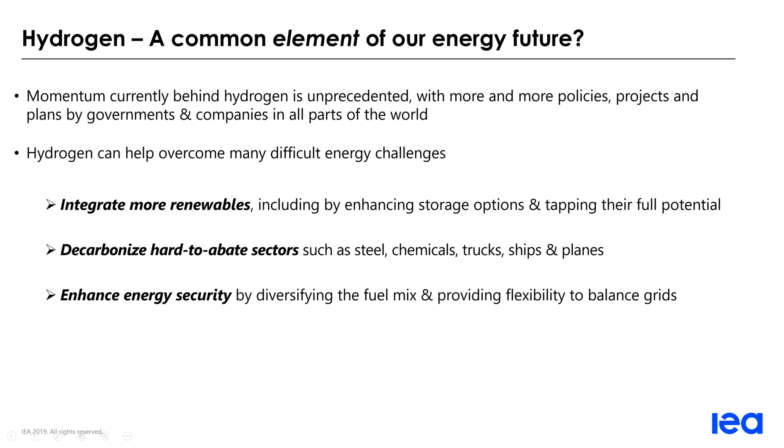And thirdly, at the IEA it's incumbent upon us to stress the importance of energy security, both through diversification of the fuel mix, but also trade. In a low carbon society that people are planning for today, hydrogen clearly adds something in terms of its ability to be made from many different energy sources, in fact, all energy sources, and to provide, as a chemical energy carrier, energy flexibly to many, many different applications. So these are 3 key changes we see in the energy policy debate that are strengthening the optimism around hydrogen.

The second is the tension that persists, especially in the transport sector, between the development of infrastructure and the investments that need to take place in end-use applications or hydrogen supply. And the coordination challenge of infrastructure is something that provides risks.

Today, most hydrogen is from fossil fuels. That's something we're going to come on to in a moment. And we need cleaner hydrogen.

Lastly, there are, in many cases, regulatory barriers or barriers in terms of absence of standardization, which are making it harder for people to make investments in this sector. So that's kind of the framing of the work that we've been doing in this report.

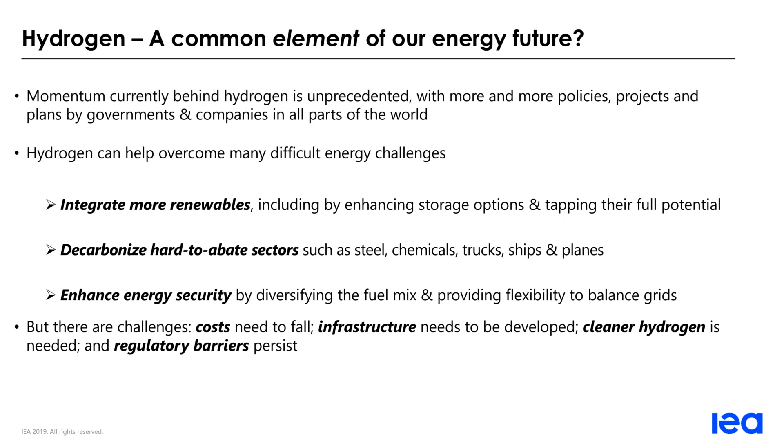In order to get a handle on some of these issues and how they are changing, we developed what we think are three unique databases for this work. The first is a database on policy support. We undertook a survey with the support of the Hydrogen Technology Collaboration Program that we manage here at the IEA, and we surveyed governments in terms of which policies they already have in place, in terms of targets, in terms of direct incentives that support investments in hydrogen.

We found that there's a growing number of countries that have policies in place to encourage hydrogen deployment. By mid-2019, the total number around the world is around 50 policies in place. So it's higher than at any time previously, and that's natural, but it's reaching a level that is really a tipping point in terms of encouraging action.

Among the G20 countries and the European Union, 11 countries have policies in place and 9 have national roadmaps for hydrogen energy. That's a data set of policies that we've made available for free on our website now, and we encourage people to go and download that at the end of this webinar, and also to provide us feedback if you have any suggestions for additions.

There's a second database that we've made freely available on projects for the supply of low carbon hydrogen around the world, and we've got some charts on that you'll be able to find in the report, and we encourage you to look at that as well.

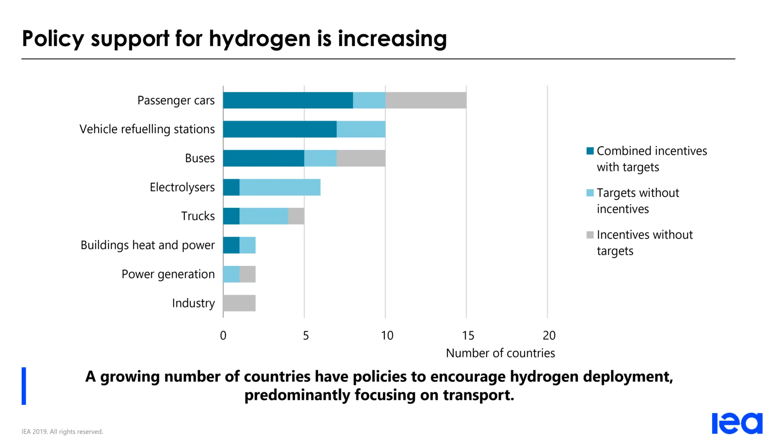I'm going to talk briefly about the third data set that we have in place now, and it's actually on the supply of hydrogen throughout the energy system since 1975. In order to understand the growth of hydrogen and where we stand today in terms of its production, where it's being produced, from which fuels, and the sectors in which it's being used around the world, we've tried to go right back to 1975 and look at energy data, industrial data, to build up a data set and to show growth.

What we found is that since 1975, demand for hydrogen has been growing at around 3% per year. That might not sound like a great deal, but if you look at this chart, demand for pure hydrogen around the world has grown 4 times over that period.

When we talk about pure hydrogen, what we mean is the use of hydrogen that is molecular hydrogen in a pure form, not mixed with anything else. The demand for that hydrogen is mostly today in the refining sector, where it's used for hydrotreating and hydrocracking of oil in order to produce transport fuels, but it's also used in the chemical sector, mainly for making ammonia, and most ammonia today is used in fertilizers, expanding food production around the world, which has had a huge impact on our ability to feed the world over those decades.

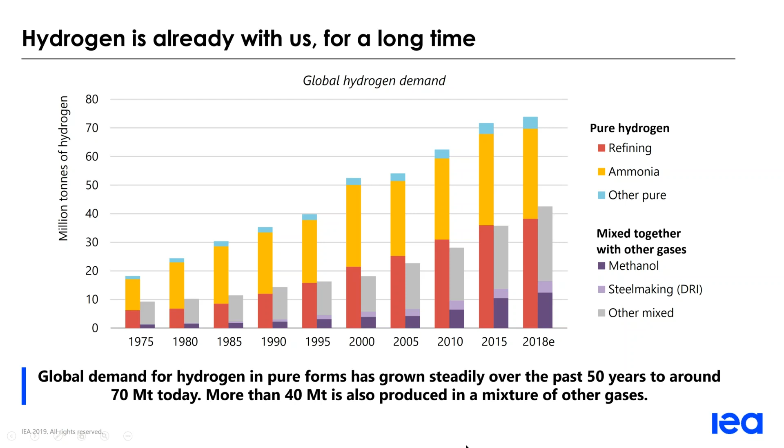As Simon just mentioned, the production of hydrogen today is largely based on fossil fuels, dominated by gas, but also coal, particularly if you look at China today. This leads globally to CO2 emissions of around 830 million tons of CO2 per year. To put this number into perspective, that corresponds to the annual CO2 emissions of the UK and Indonesia combined today, or represents a quarter of the CO2 emissions from cars on the road today worldwide.

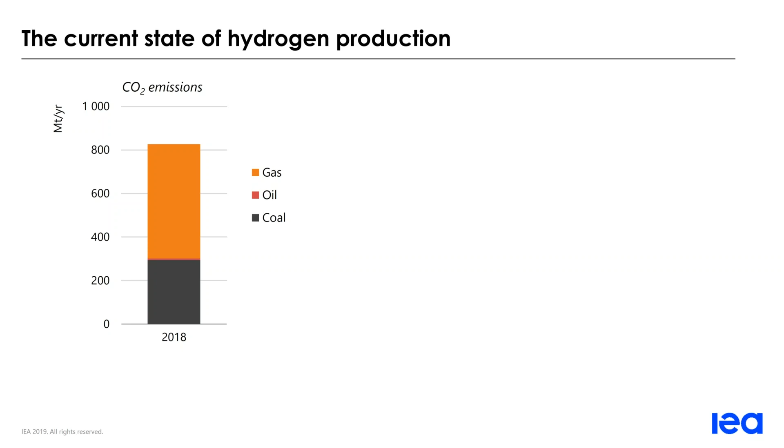It's quite understandable, or the reason why it's based on fossil fuel, I guess, is not surprising. It's really basically just economics of producing hydrogen from fossil fuels. It stays, in most cases, the cheapest option. In most parts, it's actually natural gas, the cheapest option to produce hydrogen.

Natural gas can also be coupled with CCUS, meaning that the generated CO2 is captured before it reaches the atmosphere. That can either be stored underground, or it can also be used, for example, for enhanced oil recovery.

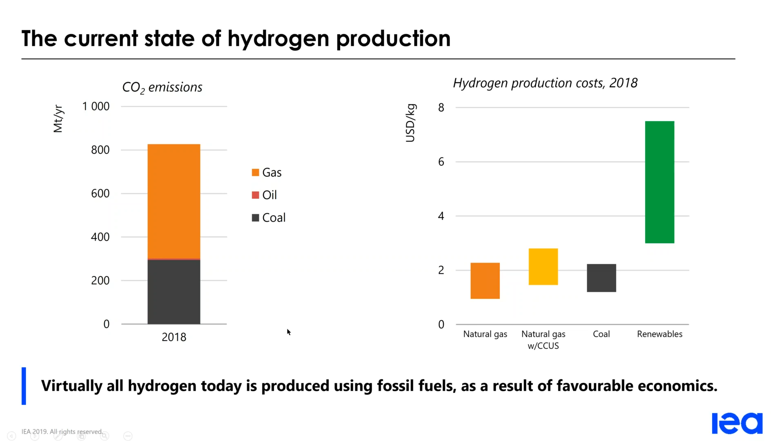If one looks at the costs of coal, it's actually also quite cheap. As I mentioned before, that's largely occurring today in China. The other option to produce hydrogen is to use electricity and water, then using electrolyzers to produce hydrogen and oxygen as a byproduct. That's actually today the most expensive option, and scale-up is really required to bring down the costs of water electrolyzers in the decades or years to come.

Scale-up of CCUS for hydrogen production has already begun. This is illustrated, or based on significant efforts of government and industry over the last two decades all around the world to deploy or introduce CCUS into the energy sector.

If we look at hydrogen production, there are today already 7 projects that are linked to CO2 capture. As I said before, otherwise it would be CO2 that would be emitted to the atmosphere. Generally, the CO2 is stored underground. As part of its use, it can also be used for enhanced oil recovery. In other cases, it may also be sold commercially and then used for industrial purposes.

Even if the number of current projects of 7, what I mentioned before, appears quite low, the hydrogen that's actually produced from these CCUS facilities today is more than 20 times the hydrogen production today from water electrolyzers around the world. We identified in our database around 200 projects of electrolyzers, and again, hydrogen from CCS production is actually larger than the hydrogen from electrolyzers.

And actually more CCS projects are underway. We identified 15 projects around the world that are in construction, so have been announced. Of these, 8 CCS projects were announced last year in Europe, and all were for the application of CCUS to hydrogen production at a large scale. The other option for CCUS also is to apply it to existing hydrogen production facilities.

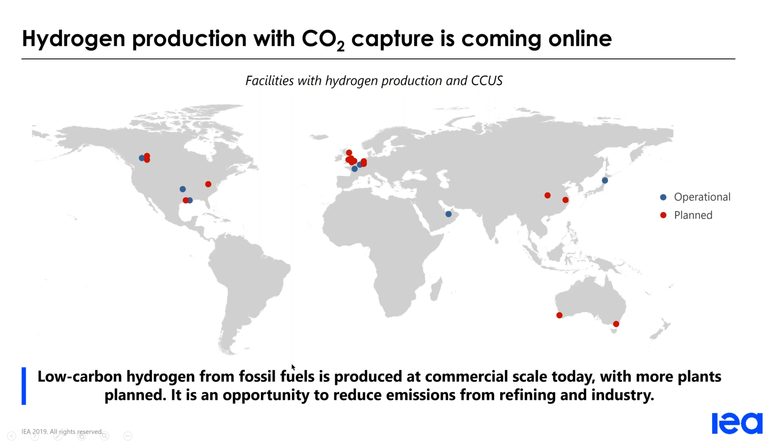I mentioned the word scale-up already a few times. So scale-up is also happening for hydrogen production from renewable electricity. Over 200 projects have we identified that have started operations since 2000 around the world. The encouraging news is they're actually getting bigger over the years. Projects have been announced today at a size up to 100 or 200 megawatts of electricity input, compared to an average of around 1 megawatt over the last decade.

But one also has to keep in mind that these projects are still relying on government funding.

They need to scale up and become commercially viable to further bring down the costs of hydrogen from water electrolyzers in the future.

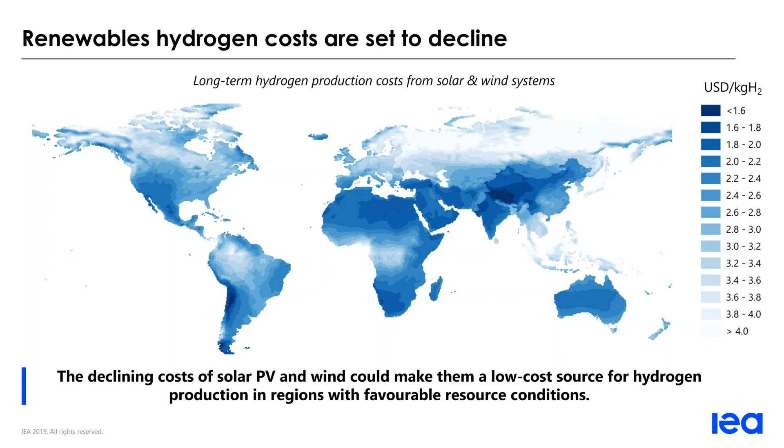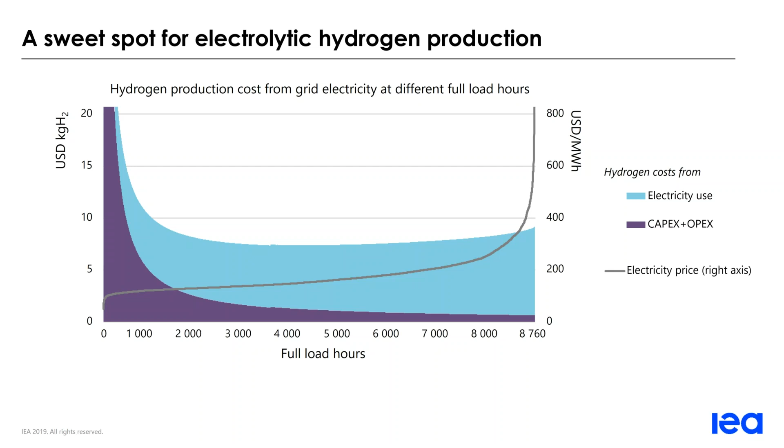So there's actually a kind of optimum or sweet spot for hydrogen production from electricity, which lies in a range depending on the electricity system and country or region—one is looking at between 2,500 and 6,000 hours per year.

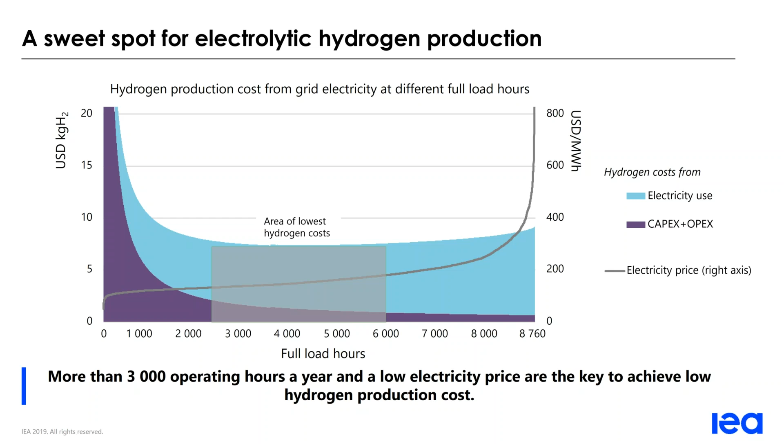Overall, whether we talk about grid electricity or dedicated renewable electricity generation, a combination of low electricity costs and sufficiently high full-load hours is needed to really get an optimum, or low hydrogen costs, from water electrolyzers. That's a kind of challenge—it's not only about having low electricity costs, but also keeping an eye on the achievable full-load hours. This combination of low electricity costs and sufficiently high full-load hours is the recipe for achieving low hydrogen production costs from water electrolyzers.

For hydrogen to be a fuel or feedstock in a clean energy system, the question is also important: what are the associated emissions with producing hydrogen? If you look at the production of hydrogen from coal, it actually leads to CO2 emissions of around 20 kilograms of CO2 per kilogram of hydrogen.

To put the number in perspective, if all the current production of 70 megatons of hydrogen were produced today from coal, it would lead to CO2 emissions of 1.4 gigatons of CO2, roughly equivalent to today's combined emissions of Japan and Australia.

The carbon footprint of hydrogen from coal can be drastically reduced by combining it with CCUS, leaving CO2 emissions of around 2 kilograms of CO2 per kilogram of hydrogen. If we look at gas, that actually leads to lower CO2 emissions than coal, of around 10 kilograms of CO2 per kilogram of hydrogen. Combining hydrogen production from gas with CCUS could reduce CO2 emissions compared to coal by 95%.

If you look at water electrolyzers, the CO2 emissions is very much linked to the carbon intensity of the used electricity. If you look today at the global average CO2 intensity of 500 grams per kilowatt hour, that would actually lead to higher CO2 emissions compared to the two fossil fuel pathways, whether it's coal or natural gas. So it's also important that the electricity used for electrolyzers is sufficiently low carbon intensity.

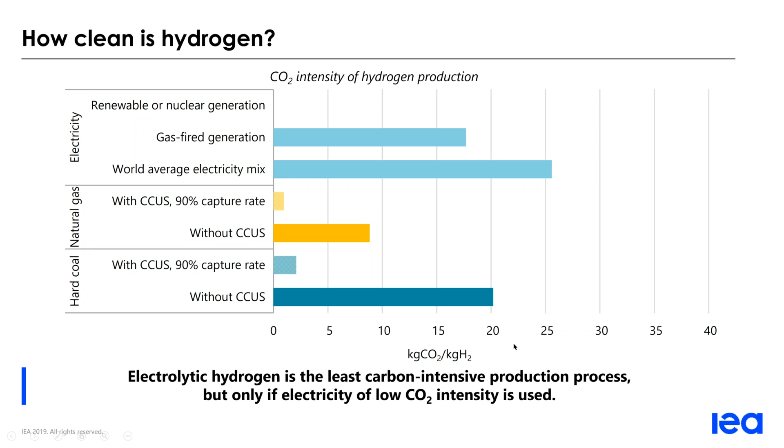If one would look at the CO2 intensity threshold to make water electrolyzers comparable to natural gas, they would need a CO2 intensity of around 185 grams of CO2. That illustrates again that for water electrolyzers to become a clean hydrogen source, the CO2 intensity of electricity has to be sufficiently low. Ideally, in the case of renewables, it would be close to zero, which would be the lowest CO2 intensive option to produce hydrogen.

So far, I only talked about the production cost of hydrogen. But if we talk about the delivered cost of hydrogen, it's also important to keep in mind the cost of transporting hydrogen, especially keeping in mind that the energy density of hydrogen is quite low. It's really a challenge in terms of transporting, storing, and distributing hydrogen, which raises the question: what's the best way to do this?

There are different possibilities available to address the transport channels. Like natural gas, hydrogen can be liquefied at temperatures of minus 250 degrees Celsius to increase its density. This requires, however, based on today's technologies, around 20 to 35% of the initial hydrogen to be liquefied. For comparison, for natural gas, this energy penalty is around 10% today.

An alternative option is to incorporate the hydrogen into larger molecules that can be more readily transported as liquids. For example, ammonia is an option, where the conversion losses would be around 7 to 18%. The third option we've analyzed is to use so-called liquid organic hydrogen carriers, where hydrogen is loaded into molecules such as toluene, which then has very similar properties to a liquid and can be transported. We look at these three options as shown here.

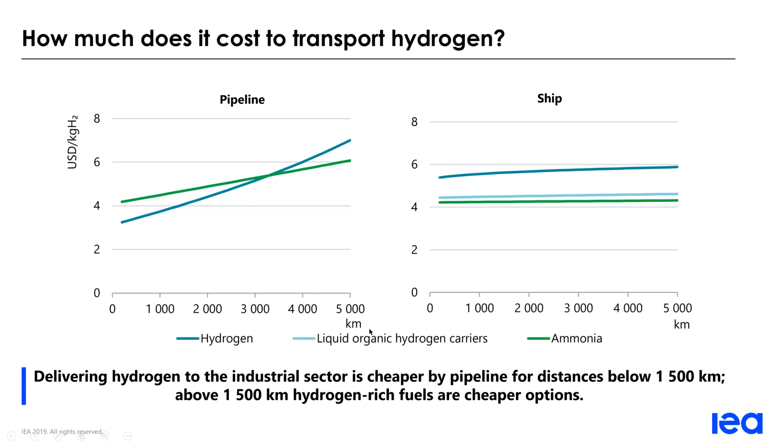So as we saw at the beginning of this presentation, today hydrogen is mainly used in the oil refining and chemical industries. But for hydrogen to make a significant contribution to the clean energy transition we need to undergo, it also needs to spread to be used in other sectors. This gives us two main categories of opportunities over the next decade.

Firstly, hydrogen demand in existing industries is growing. All of these uses can readily accept substantial quantities of clean hydrogen instead of hydrogen generated from unabated fossil fuels. And we can get to very high scales very quickly just by deploying CCUS and electrolysis for these sectors, which will bring down the costs of hydrogen production significantly over the next decades.

In the last 12 months, there have been announcements from some of the world's largest refiners, fertilizer manufacturers, and steel makers, notably in Europe and Australia, and these companies plan to build electrolyzers to supply hydrogen to reduce their emissions.

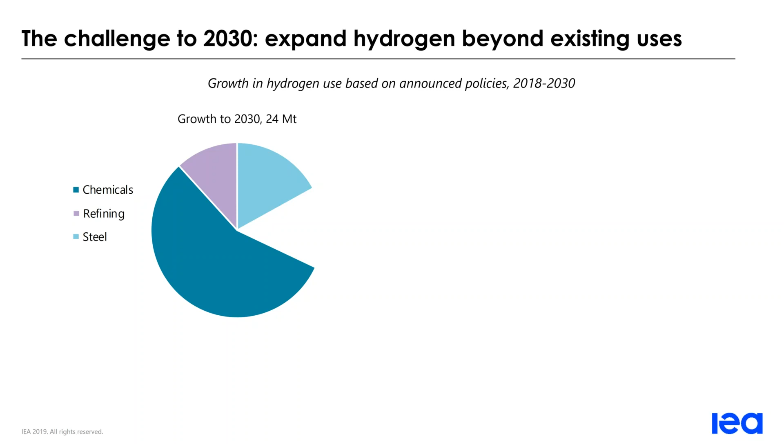And then the second category are new uses for hydrogen, and we're starting from a much lower level of demand here, but there are ambitious plans that have been set in place around the world.

For example, in the building sector, it's already been shown that hydrogen can be blended into the natural gas grid and used safely in homes. But now projects in Europe and Canada are aiming for a significant scale up in this area. And if you add up the ambitions of these projects around the world, these proposed plans look to supply about 4 million homes worth of hydrogen by 2030.

And then in the cars and vehicle segment more generally, there are 11,200 fuel cell cars on the road today. But just looking at official governments' targets, this would increase the vehicle component to 2.5 million by 2030 if all these plans were realized. And then there are a couple of other sectors where we think hydrogen will be particularly important in the long term, but where it hasn't made much of a dent in the market yet.

So clean hydrogen converted to liquid fuels or ammonia, like Uwe was touching on before, using technologies that are well known today - these are among the most promising options for cleaning up shipping and aviation. But they'll take some time to develop, and we need to start on this now.

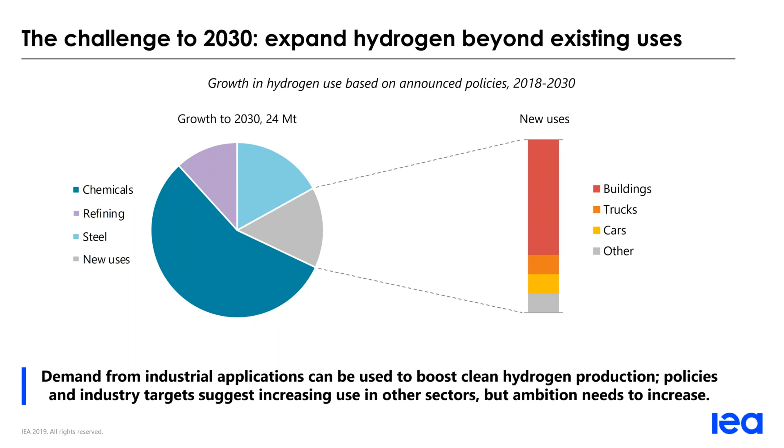So let's first take a look at the existing sources of demand that we see growing in the period to 2030 and beyond, with the chemical sector being the largest among these. The two most important bulk chemicals from a hydrogen demand perspective are ammonia and methanol.

This rate of growth would mean around 38 million tons of hydrogen demand for ammonia production by 2030, relative to around 31 million tons today.

For methanol, demand for existing applications is set to grow at around 3.6% per year between 2018 and 2030, so faster than ammonia. And the methanol-to-olefins and methanol-to-aromatics segment of this is expected to grow even faster. This is a chemical technology that allows you to produce plastics and other materials from, say, coal feedstock, which is commonplace in China today.

And this rate of growth would mean 19 million tons of hydrogen demand for methanol by 2030, relative to around 12 million tons today. So quite fast growth in the methanol segment.

And there are some other sectors which I won't have time to go into here - existing uses. We expect nearly 3 million tons of demand growth from the refining sector and around 4 million tons from the iron and steel sector in the direct reduced iron route that was mentioned at the beginning.

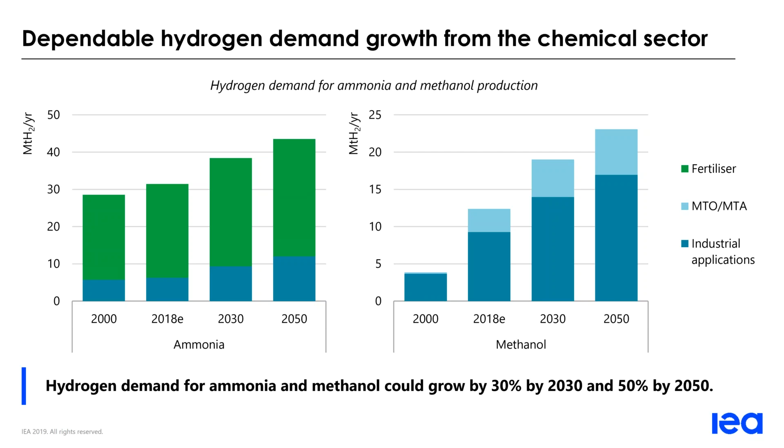So again, sticking with the chemical sector, let's take a look at the economics of production via various process routes. Fossil fuels have long been a convenient and cost-effective source of both the hydrogen and, in methanol's case, the hydrogen and the carbon that's required as feedstock for these chemicals.

In 2018, around 270 million tons of oil equivalent of mainly gas and coal were used to produce the hydrogen for these two products. This quantity is roughly equivalent to the combined oil demand of Brazil and Russia. Gas is the dominant feedstock for ammonia and methanol globally, with China and small shares of production elsewhere utilizing coal.

So taking a look at ammonia specifically, we can see considerable variance in costs for production based on both coal and natural gas. In regions with high natural gas prices, such as Japan, the levelized cost of ammonia production can be more than $500 per ton, whereas in those with access to low-cost gas reserves, such as the Middle East, levelized production costs can be less than half this figure.

Then the electrolysis pathway and biomass gasification, which is not shown here for clarity - these routes offer the potential to eliminate CO2 emissions altogether on a net direct basis, with the caveats that the CO2 intensity of the electricity, as Uwe outlined, has to be below a certain level to get an emissions benefit, and the sustainability of the biomass in the biomass gasification case also has to be a factor to consider.

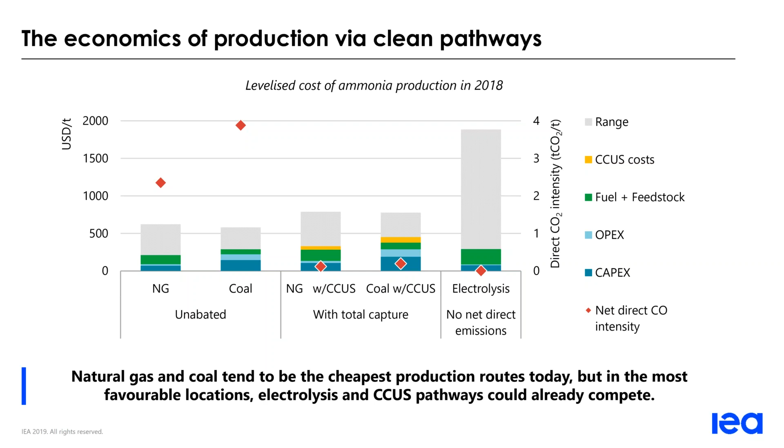So besides existing industrial uses, of which the chemical sector was a partial summary, hydrogen has also got the potential to grow in new applications. And I want to highlight just two in this presentation, as we don't have a lot of time, but please dig into the report where we examine several others.

So firstly, trucks. While there are around 11,200 hydrogen cars on the road today, there are only around 400 trucks and around 500 buses. Not only do trucks consume much more hydrogen than cars over their lifetime, but they also tend to concentrate their journeys in so-called corridors, traversing specific highways to and from ports and industrial hubs. These are the main reasons why we identify them as a key new application.

And just to take a look here at the future economics - we're using the total cost of ownership metric here. If hydrogen fuel cells were to reach a cost of $95 per kilowatt, and battery costs were to decline to $100 per kilowatt hour, the battery and fuel cell trucks we examine here could have a similar cost, assuming a driving range of 500 kilometers.

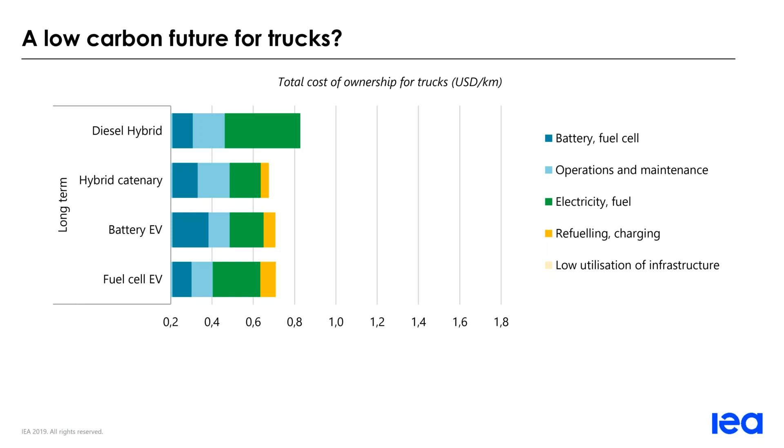One of the critical variables to achieve this competitiveness is to ensure that the hydrogen being used is of low cost. This includes low production and distribution costs that Uwe has covered in the previous slides, but also a low cost for the refueling step.

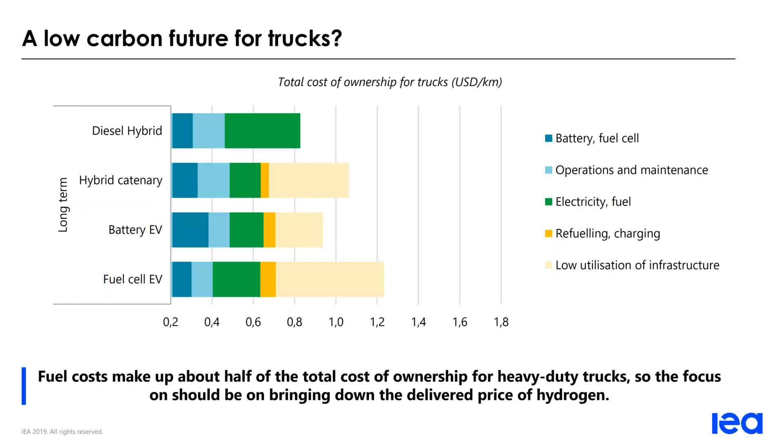So this in turn requires a high degree of utilization of the refueling stations to ensure that the capex, which can be in the order of $1.5 to $2 million for a station, only accounts for a small share of the overall hydrogen delivery cost. Of course, an alternative to achieving this high utilization is more of a hub and spoke model rather than refueling stations along the corridor, where a dedicated fleet can operate on fixed routes and then refuel at a single centralized station.

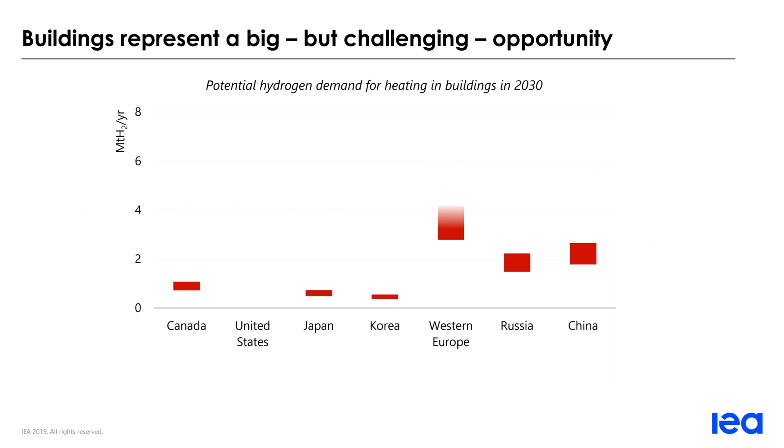And now lastly, just to move on to the second example of new applications: heating demand in the building sector. While there's much talk of blending some proportion of hydrogen into existing natural gas supplies, here we examine the near-term potential and the economics of a pure hydrogen supply, similar to projects that are being discussed in the UK at the moment.

So we find that hydrogen used for heating in buildings presents a substantial outlet for growth, but the economics of this will be critical. Delivered hydrogen prices to consumers would need to be in the range of $1.5 to $3 per kilogram of hydrogen, to compete with natural gas boilers and electric heat pumps on an already installed basis, excluding the capex component. For certain countries like Canada and the US, where lots of cheap gas is available, the hydrogen prices would have to be even lower, so around $1 per kilogram of hydrogen.

Serious planning, though, would need to be undertaken today for the necessary deployment for the potential identified here to be achieved by 2030. It would also be imperative to overcome concerns relating to safety of handling and distributing hydrogen in residential areas.

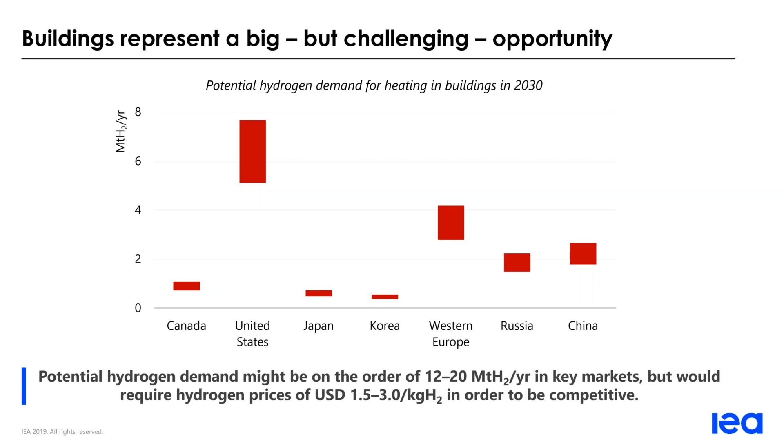The way we've ended up framing our policy recommendations is around what we've called four key opportunities for scaling up hydrogen. Throughout the report we focus on three time horizons: today, 2030, and the long term, broadly mid-century. We see 2030 as a critical moment for hydrogen in its deployment journey. Getting to 2030 with a springboard for future hydrogen deployment established, meaning bringing down costs, scaling up supply technologies, and developing an industry that can make sustainable investments based on confidence in future revenues, is the key challenge for governments and industry in the next ten years.

Looking at where the risks lie and the challenges in various sectors, we've tried to find these four opportunities based largely on where there is existing infrastructure, so there isn't the coordination problem of developing new infrastructure and new sources of demand and investments in new equipment all at the same time as developing low carbon hydrogen supply, while also building on existing government policies and targets.

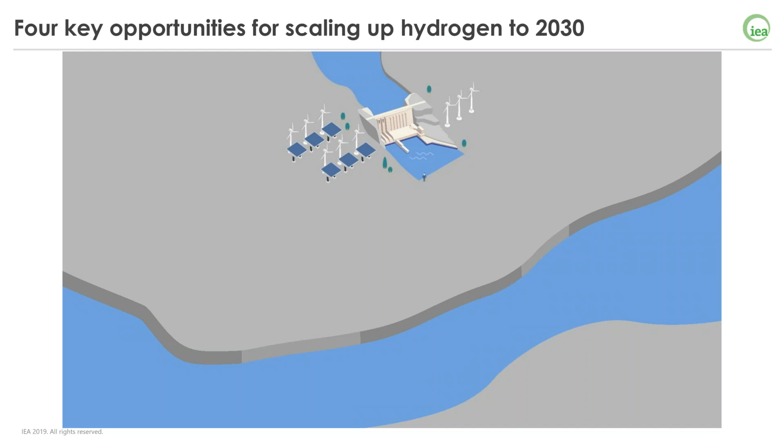Quickly going through the four as they appear on the map here: the first is industrial hubs. We see a great opportunity to make industrial ports the nerve centers for scaling up the use of clean hydrogen over the next decade. Much of the refining and chemicals production that uses hydrogen today, based on fossil fuels, is already concentrated in coastal industrial zones around the world, including the North Sea in Europe, the Gulf Coast in North America, and Southeast China. There's a real opportunity to encourage these plants to begin shifting to cleaner hydrogen production and use.

There's no need in those situations to develop new infrastructure for using that hydrogen. Those industries have the protocols in place for the safe use of hydrogen and can use it at scale. What this would do is scale up hydrogen production, whether from electrolysis or CCS, and drive down costs. By being near ports, these hubs are great connecting nodes between inland use of hydrogen, potentially via pipelines, and hydrogen use on ships and hydrogen trade.

When I mention pipelines, that brings me to the next opportunity, which is talked about especially in Europe at the moment: the use of hydrogen in gas grids. There hasn't been time to go into this in much detail. It's related to the story of use in building heat that Peter was just describing. But there's an opportunity to blend hydrogen at low volumes into the gas grid without needing much new infrastructure or investment in end-use equipment, and also to begin exploring how some existing pipelines, making use of existing infrastructure, capacity, and skills around the world, could convert to 100% hydrogen use.

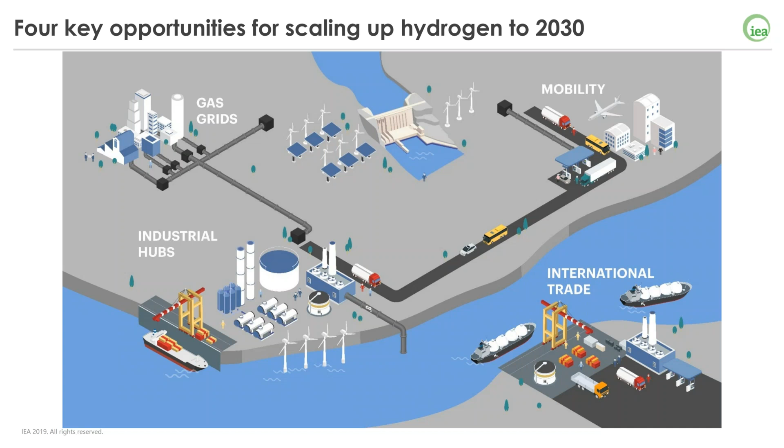I think that picture of those four key opportunities, the common thread apart from building on existing infrastructure, is that we need to start now. The decade to come is going to be a crucial time, and there are great opportunities for cooperation. That's also a thread that runs through the 7 key policy recommendations we've included in the report, with which I'm going to conclude our presentation today.

So putting them all up on the screen here and quickly talking through them - they're fleshed out in much more detail in the report, but I'll mention a couple that haven't been touched on so far.

The first one I think is critically important: establishing a role for hydrogen in long-term energy strategies. This isn't about just coming up with a hydrogen-specific policy, whether in government or corporate strategy. It's about how that fits into the overall expectations for the evolution of the energy system and the key policy targets that different countries will have. Those policy targets will touch on air pollution, energy security, energy access, as well as climate change. But that long-term guidance is necessary to provide investor confidence.

We've also highlighted the need to support R&D. I'd say this isn't just about government funding for public R&D projects. The key thing is that we need innovation, but we need innovation coming from all angles. One key element, alongside stimulating commercial demand for scaling up hydrogen which will deliver economies of scale, is providing a supportive framework for the private sector to invest in research and demonstration projects in a coordinated way.

That begins to tackle some of the issues we've raised in the report around the needs for fuel cell materials efficiency, electrolyzer efficiency - especially if those electrolyzers are going to be run at low load factors - and a whole host of other great innovation opportunities besides, because let's not forget that the competitors to hydrogen across the energy system are also going to be improving, and there will also be innovation elsewhere.

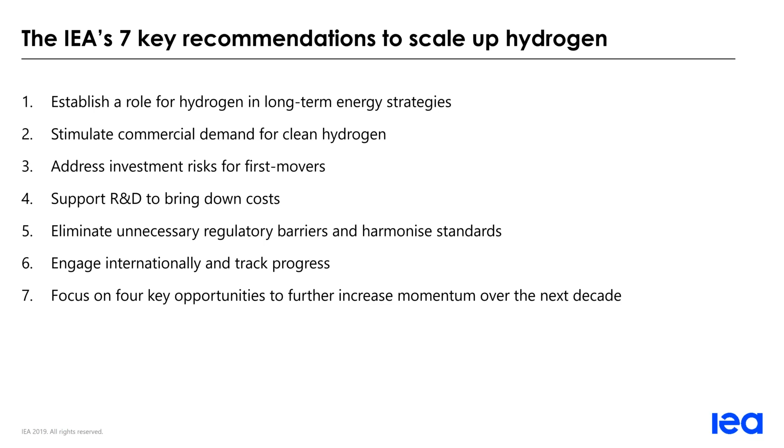The final thing I'll do before closing the webinar is move on from our recommendations to mention that the work on hydrogen at the IEA and around the world does not stop with one report. I think we are modest enough to recognize that much more needs to be done. From the IEA side, we encourage people to look at our website, iea.org hydrogen, which will be continually updated with the latest information and where you can download data sets, as I said.

There's various other ways in which we'll be updating that with commentaries, but also something that may have passed people by was the Clean Energy Ministerial launched a new hydrogen initiative just last month and invited the IEA to be the coordinator of that initiative. So stand by for more information on our website on that.

Besides that, the things we've learned in producing the report will be fed into other IEA analysis, such as the World Energy Outlook and our scenario work. In terms of analysis we think needs to be done elsewhere, we've highlighted a couple of things related to regional energy scenarios: what are the trade-offs at a local level, what are the opportunities, and how do we translate those scenarios into specific sectoral and regional policies and bring those sectors along with us in terms of making targets and strategies?

For government and industry specifically, we wanted to recognize there's a need to prioritize policies that build upon dependable uses in industrial applications, because the carbon footprint of current hydrogen use is one of the key issues that emerged in our work on hydrogen, but also to stimulate new sources of demand. There's a reason we presented the 4 key opportunities as a cartoonish schematic all on one slide—it's because they are connected, and all of these opportunities can work together synergistically. Finding those synergies is something government and industry can work on together.